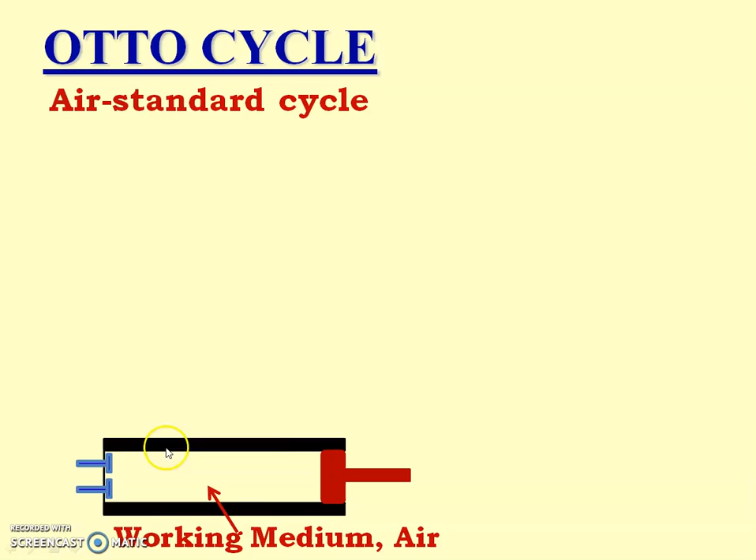The topics included in today's lecture are construction and working of Otto cycle and efficiency of Otto cycle. So Otto cycle, which is the air standard cycle, and it is a reciprocating engine. So this one is the cylinder, this one is the piston, and working medium air is filled up inside the cylinder. Now let us draw the PV diagram.

So that is the PV diagram, and this condition is known as the initial condition. So it is state number 1, and at state number 1 pressure is P1 and volume is V1, and V1 is equals to V total. So we know that this is the total volume of cylinder. So V1 is equals to Vt is equals to total volume of cylinder. Now

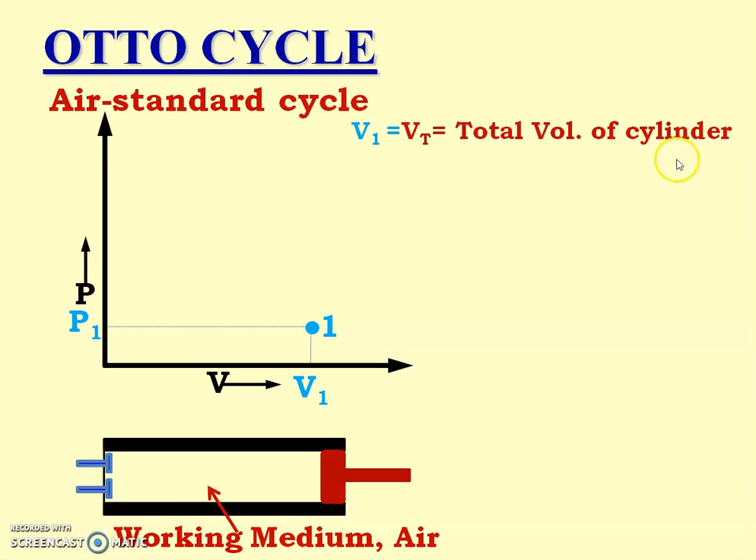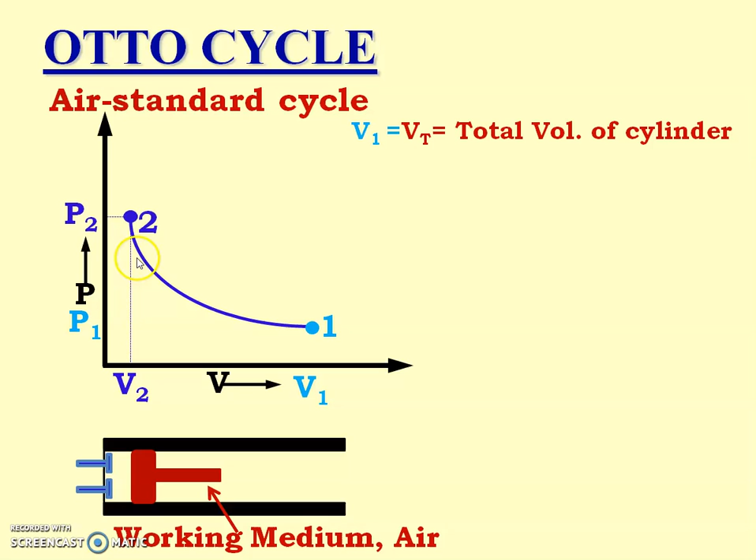piston moves from right hand side to left hand side and reaches to the state number 2. And at state number 2, the pressure is P2 and volume is V2. The pressure of air, that is the working medium, has increased and volume of air, or that is working medium, has reduced. So that is nothing but the point number 2 or the state number 2,

and that is the V2. And as the piston is at the dead center, that is the inner dead center, now piston cannot move towards the left, and so this volume is the clearance volume. So V2 is equals to Vc, that is equals to clearance volume. And the process number 1 to 2 is known as the isentropic compression process. So we say that the working medium air has passed through the isentropic compression process.

Now let us see. We are supplying heat when piston is at point number 2. So it is known as the heat supplied, and heat is supplied at constant volume because at that time volume of air, that is working medium, does not change. So it is a vertical line 2 to 3, and heat is supplied, and 2 to 3 process is known as the constant volume heat supply process.

So we can say that at point number 3 pressure is P3 and volume is V3, where V2 is equals to V3. So we can write down here V3 is equals to V2 is equals to Vc is equals to clearance volume.

Now piston moves from your left hand side to right hand side, that is IDC to ODC, and reaches to the point number 4 or state number 4, and at state number 4 pressure is P4 and volume is V4, such a way that V1 is equals to V4, and that process is known as the isentropic expansion process. So process number 3-4 is the isentropic expansion process, and it is in such a way that V4 is equals to V1, that is equals to Vt is equals to total volume of cylinder.

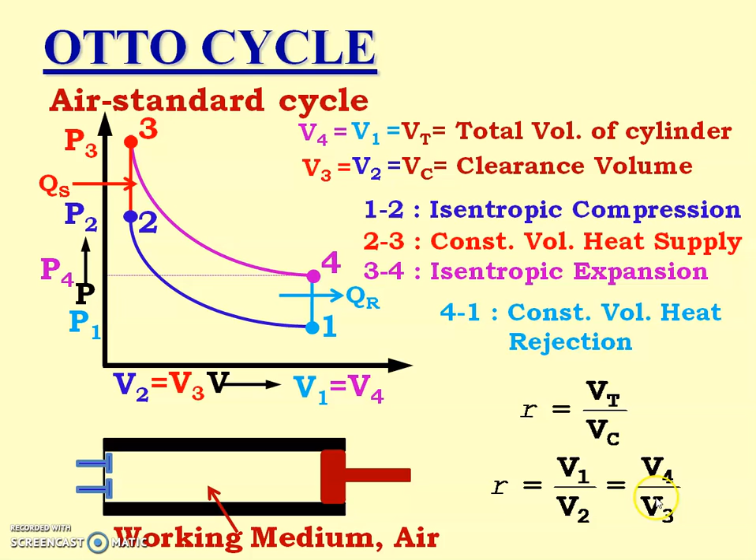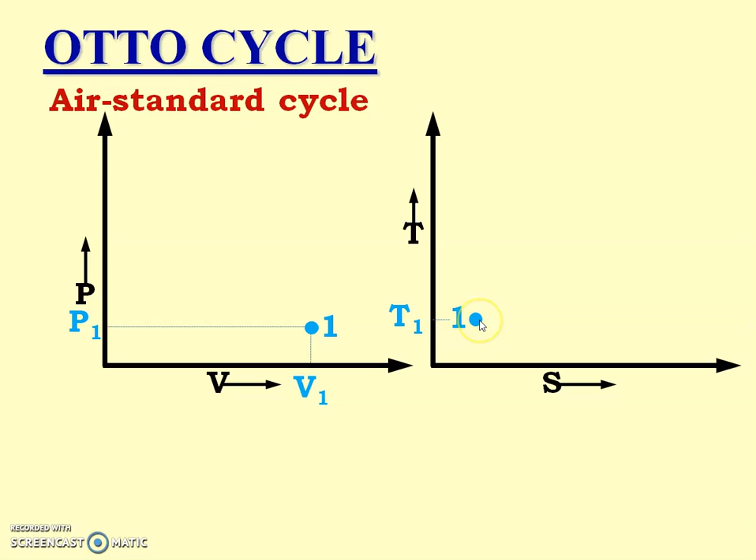Now we are going to draw the TS diagram of the air standard cycle. We have already done the PV diagram. So let us start with the PV diagram. At point 1, pressure is P1, volume is V1, temperature is T1, and entropy is S1. Now it passes through the isentropic compression process. 1 to 2 is the isentropic compression process.

Now as it is the isentropic compression process, it can be drawn as a vertical line on TS diagram, because S is the entropy and constant entropy is drawn by the vertical line. So 1 to 2 is the isentropic compression process where the entropy is same, that is S1 is equals to S2, and temperature at point number 1 is T1 and temperature at point number 2 is T2.

Then it passes through the next process, that is the constant volume heat supply, process number 2 to 3. So that can be drawn by the curved line on TS diagram. This 2 to 3 is the constant volume heat supply, and at point number 3 temperature is T3 and the entropy is S3.

Now it passes through the next process, that is process 3 to 4, known as the isentropic expansion process. So as it is an isentropic expansion process, entropy remains constant. Again, due to that, it is shown by a vertical line from the point number 3. So 3 to 4 is the isentropic process, and at point number 4, the temperature is T4 and entropy is S4. And as 3 to 4 is the isentropic process, S3 is equals to S4.

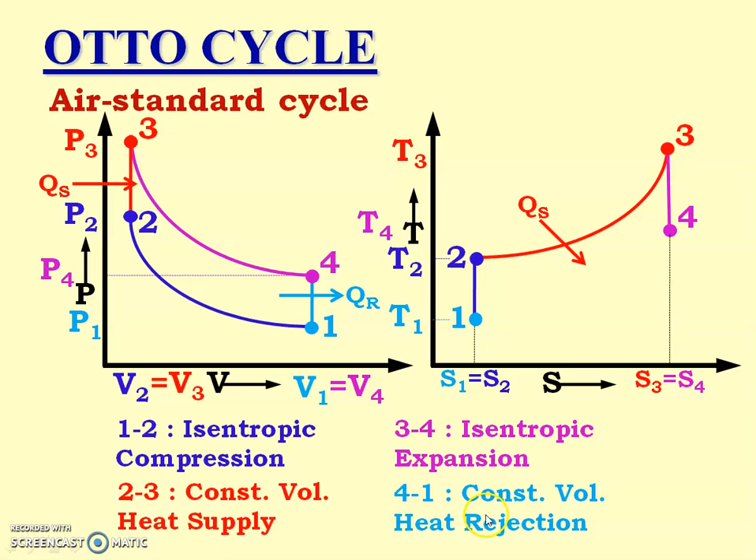Last process is constant volume heat rejection, 4 to 1 process. So it can be drawn by the curve on the TS diagram where heat is rejected.

Now, heat supplied. Heat is supplied during which process out of the 4 processes? Yes, heat is supplied in the second process, that is process 2 to 3, and it is constant volume heat supply. So what is the equation for heat for the constant volume process? Here we have to recall the fundamentals of the chapter properties of gas. For the constant volume process, we recall the equation for heat transfer and put it here.

So heat supplied is equal to mCV delta T, right? So CV into delta T. Now what is the temperature difference here? Here the temperature difference is between T2 and T3. T3 is the higher temperature, T2 is the lower temperature. So it is mCV (T3 minus T2). That is the heat supplied equation.

Next is the heat rejected, QR. Let us see during which process heat rejection takes place. Yes, during process 4 to 1 the heat rejection takes place, and the process name is constant volume heat rejection. So we put here the equation for heat transfer for the constant volume process. Again it is the same, mCV delta T, but here delta T is for the process 4 to 1, so it is T4 minus T1. So QR is equal to m into CV into (T4 minus T1).

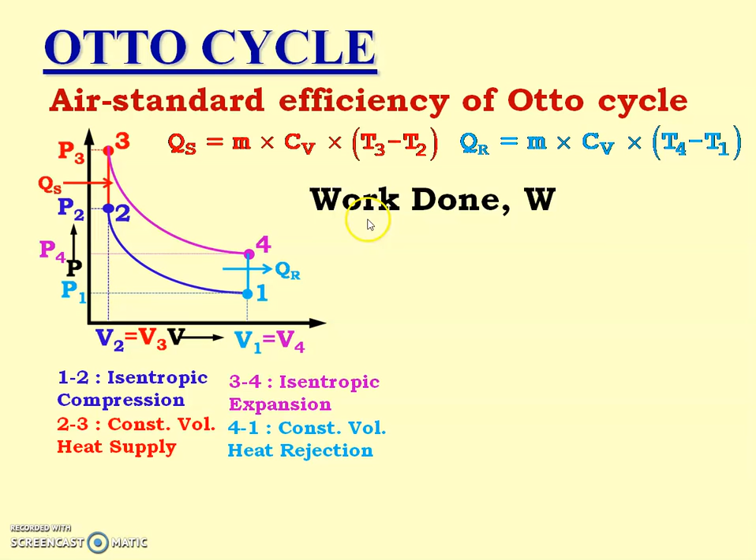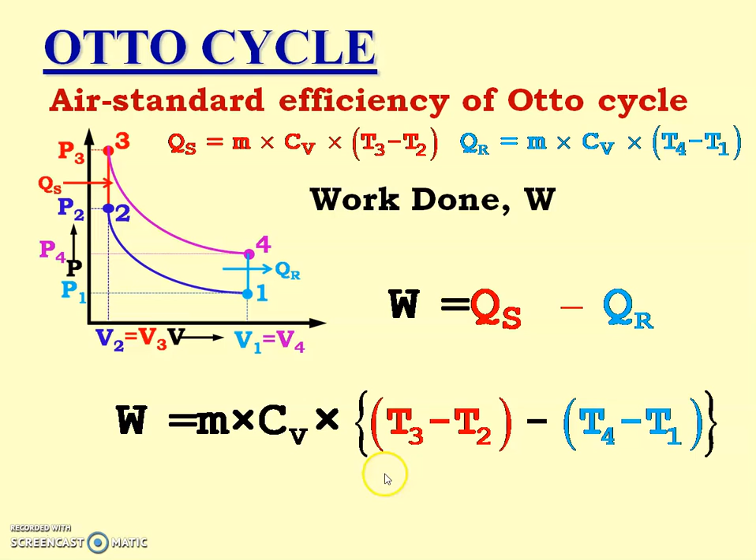So we have got QS and QR. Now let us calculate the work done. Work done is equal to QS minus QR. Substituting these two values and taking out the common parameters. Which parameters are common? M and CV. So we take out M into CV, into bracket (T3 minus T2) minus (T4 minus T1). That is the work done during the Otto cycle.

Now let us calculate the efficiency of the Otto cycle, known as the air standard efficiency of the Otto cycle. It is equal to work done upon heat supplied. The work done equation we have already calculated, and heat supplied we have already found. So putting the values: M into CV into (T3 minus T2) minus (T4 minus T1), divided by M into CV into (T3 minus T2). Which term can be cancelled from numerator and denominator? Yes, M into CV. So the answer is (T3 minus T2) minus (T4 minus T1) divided by (T3 minus T2).

Again, this T3 minus T2 term can be cancelled. So the answer is 1 minus (T4 minus T1) divided by (T3 minus T2). That is known as the air standard efficiency equation for the Otto cycle in terms of temperature. It means if we know the temperature of all 4 states, we can calculate the efficiency of the Otto cycle. Now let us simplify the equation further.

Process 1 to 2 is the isentropic compression process. Using the relationship between P, V and T for the isentropic process, we can write T2 by T1 equals V1 by V2 raised to gamma minus 1. Now what is V1 by V2 for our case? It is R, the compression ratio. So T2 by T1 equals R raised to gamma minus 1, and so T2 equals T1 multiplied by R raised to gamma minus 1.

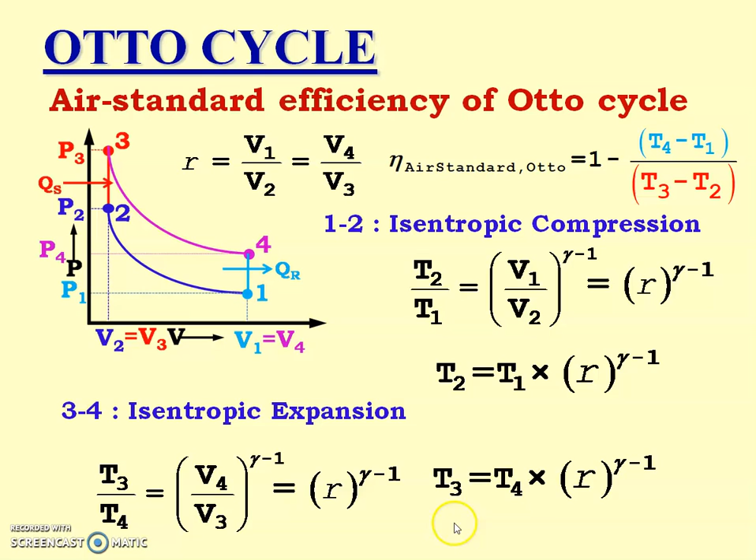Now let us substitute T2 and T3 in the air standard efficiency equation. It will be 1 minus (T4 minus T1) in the numerator, divided by, instead of T3, T4 multiplied by R raised to gamma minus 1, minus, instead of T2, T1 into R raised to gamma minus 1. What is common in the denominator? R raised to gamma minus 1. Take it out. So it is 1 minus (T4 minus T1) divided by R raised to gamma minus 1 multiplied by (T4 minus T1). This bracket can be cancelled. So the air standard efficiency of the Otto cycle equals 1 minus 1 upon R raised to gamma minus 1.

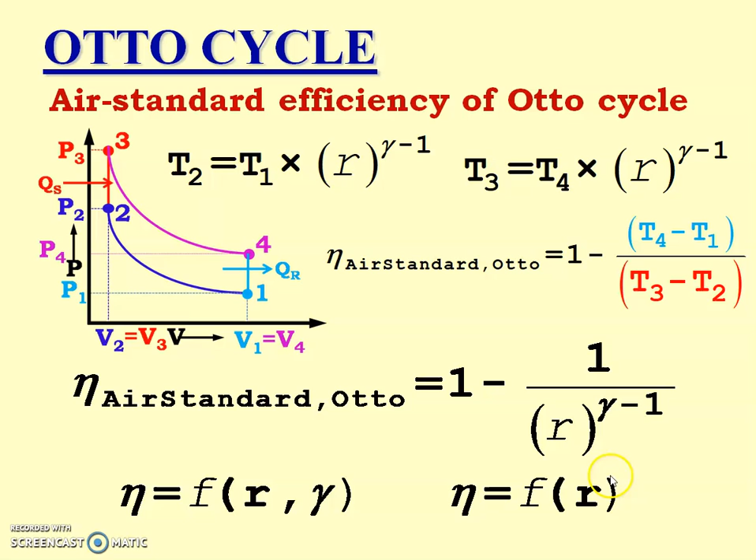So as the compression ratio increases, thermal efficiency also increases. However, there is a limit on R depending on the fuel. Due to a high compression ratio, the temperature of the fuel may increase during the compression process and it may ignite the fuel in advance, causing knock.